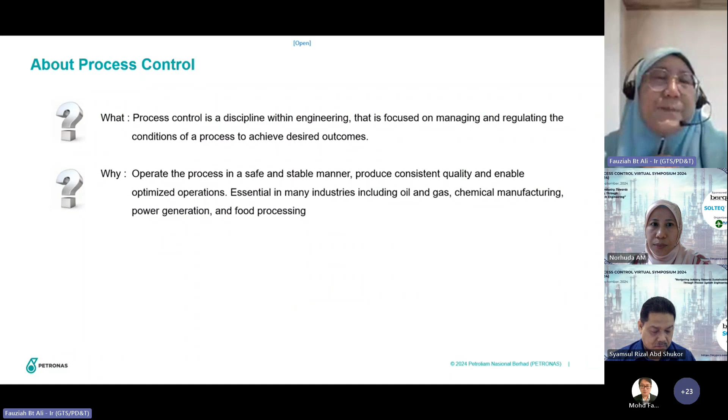So let's go into this a little bit about process control. So what is process control and why? To me, process control is a discipline within the engineering field that is focused on managing and regulating the conditions of a process to achieve our desired outcomes. And why do we have that? Because we need to operate the process in a safe and stable manner, produce consistent quality, and now process control is no longer about controlling, it is also about optimizing the process. It is essential in many industries: oil and gas, chemical manufacturing, power generation, and food processing.

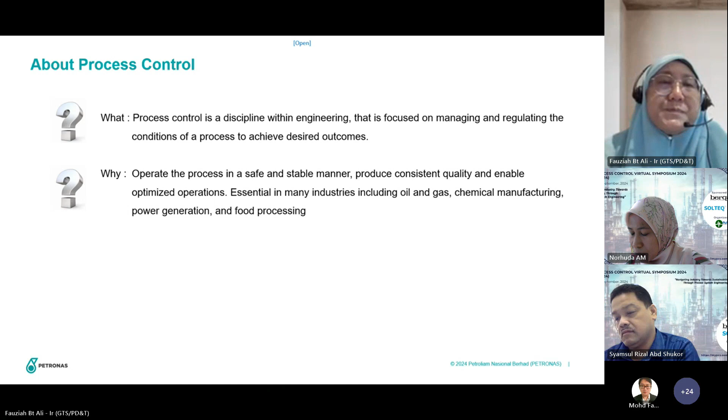And we'll be surprised, a lot of industries today are very tightly controlled. That is why, for example, our bread is very consistent. The bread that we buy, I will not mention brands, will taste the same no matter where you go. Every day they will taste the same. So process control is essential in a lot of industries. But I will focus mainly on the energy industry because that is where I spent time in my career.

So a little bit about the evolution of process control. Now, why do we want to go through the evolution? Because each stage essentially lays the foundation for the next stage. So by understanding the evolution of process control, it may help us to anticipate what will happen in the future.

So a long time ago, control was basically manual, based on operator experience. So people physically operate the plant, I guess the way we physically open our own taps at home, right? People will physically open certain valves. That's how they used to do it.

Then they have basic mechanical feedback control, which are all physical parts linked together. If I may, mechanical feedback control that still survives today, for example, would be our water closet, our toilet. When we flush, essentially there's a float and that will mechanically let in air and then let in water. And then when the water reaches a certain level, it will stop. So we always have water in our toilet tank, right? So that is the mechanical feedback controlling level. It is quite rough.

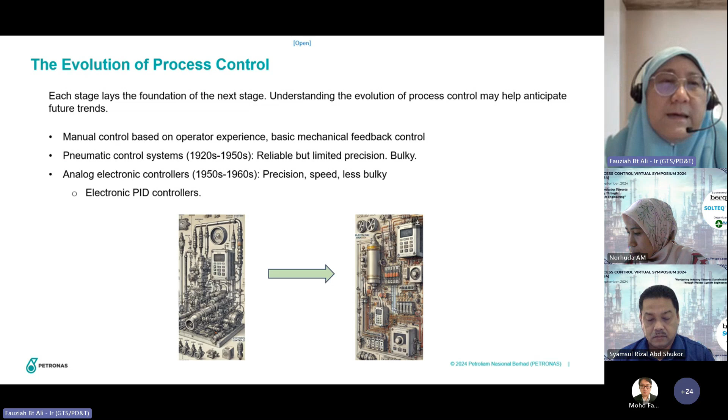Proceeded to pneumatic control systems, which are reliable but not very precise, and they're quite bulky. So later in the 50s, 60s, we had evolved to analog electronic controllers. They are more precise, they are quite fast, and they are less bulky. And there we have electronic PID controllers. So the photo I show below is the evolution from the bulky pneumatic controllers to the electronic PID controllers.

From there, later in the 70s onwards, right? We go to digital control systems.

Sorry, I am on PowerPoint mode. So if somehow I get disconnected, can somebody call my handphone? I know Professor Sam has got my phone number.

Okay. So moving forward to digital control systems, we have PLCs, which are maybe smaller scale but flexible, right? The scope is maybe more on individual equipment. We have DCS, distributed control system, and that involves multiple processors. We have SCADA for large-scale process supervision, mainly for data acquisition over a large geographical area, usually. And the device integration has become more simplified, more integrated.

We can now link with enterprise resource planning. So for example, from the planner, we could, if we wanted to, depending on the demand, actually directly control the process. We have multivariable predictive control, which essentially controls the whole envelope, the whole process, using model predictive control, controlling many variables to achieve a common objective. And nowadays we have wireless and mobile technologies, and that adds a lot of flexibility.

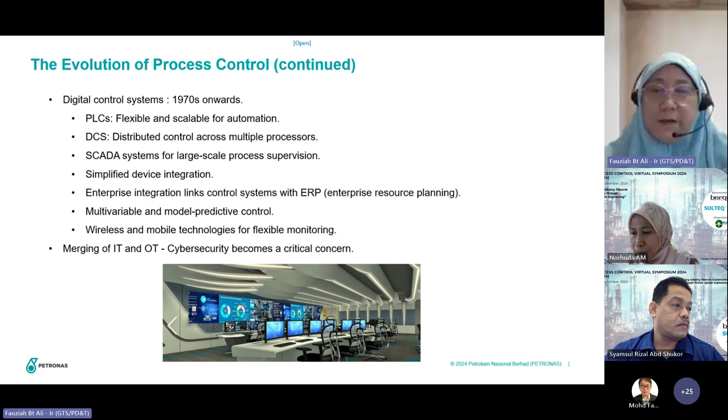So if we talk about going into the future with process control, then I would say key questions to be asked would be, what is the future? What type of processes will there be for process control to operate and optimize? Are we having the same processes that we are today? We have refineries, we have gas plants, or will there be different processes? And also, what will be the control technologies of the future? Will it just be multivariable predictive control, or will there be other control technologies?

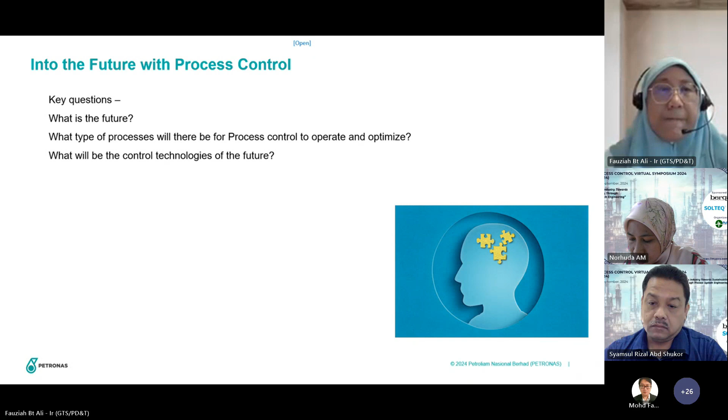So I see that among the major concerns for the future are, number one, many resources are depleting, right? Non-renewable resources like oil, gas, they are depleting. Minerals are depleting. A lot of natural resources we cannot replace. There's also climate change and environmental concerns. We know that we have a global temperature rise concern, and that has led to the Paris Agreement. And we are now seeing environmental concerns like pollution. We have smog. Of course, there are some people with conspiracy theories saying that climate change is a hoax. But being engineers, we follow science. So we say climate change is real.

And there's also the major concern of waste. If we just Google waste, we can see all around the world mounds and mounds of waste piling up everywhere, finding their way into the ocean, for example. So this is an area of major concern in the future.

So with these concerns, going into the future, there will be a lot of focus on conservation of resources. This will lead to asset operational excellence, where we will use less utilities, less fuel, less water, less steam, etc. So we need to get more for less, essentially. There's no wastage. We need to operate in a very, very efficient manner. Also, we will be finding renewable alternatives, so that we do not have to worry about depletion of resources. To combat climate change and environmental concerns, we will also find cleaner alternatives. And to combat waste, we will find technologies to enable a circular economy.

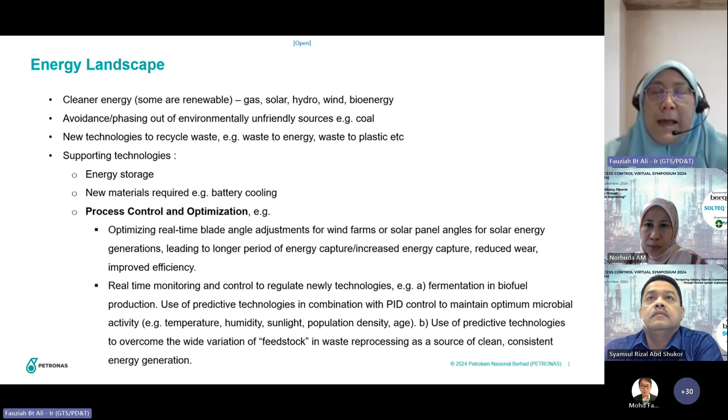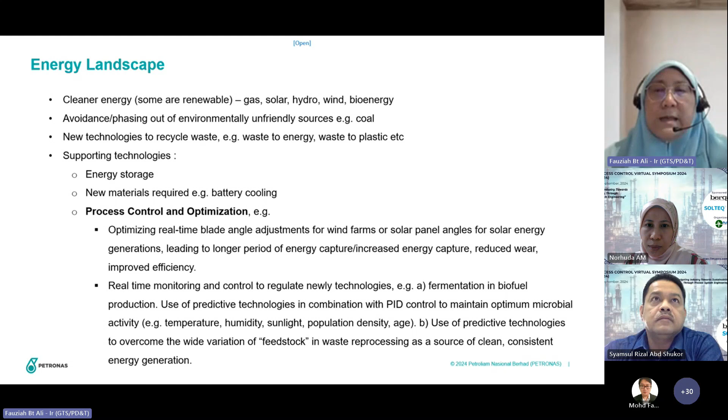We could also use predictive technologies to overcome a wide variation of feedstock in reprocessing waste. For example, in waste to energy, typically waste feedstock is highly variable in the feed quality. It's not like I am producing ethylene from ethane. My feedstock will be ethane, and they are quite consistent in quality. Processing waste will have a lot of variation in qualities, and definitely predictive technologies will be very helpful.

There will be a prevalent use of predictive technologies and more advanced algorithms for process control in today's emerging processes. So what today is maybe not yet commercialized, still maybe a trial pilot plant, eventually and very soon, we will implement predictive technology and advanced algorithms for this.

Also, there is prevalent use of digital twins, including in renewable energy, real-time closed-loop optimization, managing technical and economic trade-offs, as well as real-time change in energy demands. So these are high levels of control and optimization that I believe we need to be prepared for.

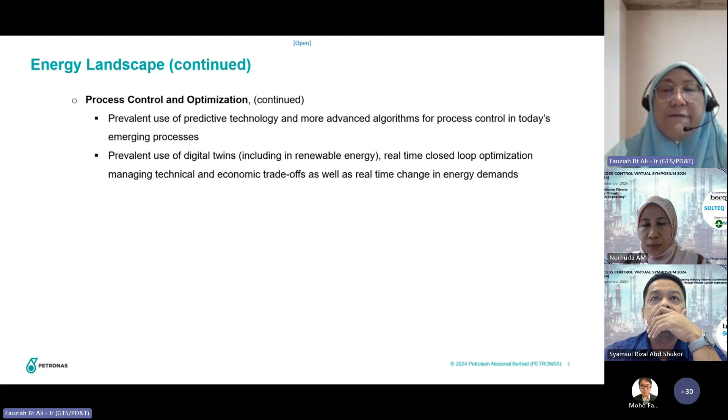So food for thought, are we rising to the challenge? Are we ready? Number one, can we embrace the new processes that are still in developing stage or have not been developed? When people are talking about, you know, from gray sources to blue, green, turquoise, whatever, right? Are we ready to embrace that these are the new processes? These are the processes of the future.

Okay. Are we ready to be part of development of new processes? If I'm going to be producing, for example, hydrogen fuel, is the control ready to support this new process? If I'm producing green methane or whatever, is process control ready with the technologies to control these new processes?

Are we able to learn, unlearn, and relearn? Some old technologies have got to be let go to be replaced by new technologies. Are we so attached to the old technologies that we reject new technologies? Also, are we able to adapt and apply new technologies intelligently? Because not everything new is better, right? Not everything old is good.

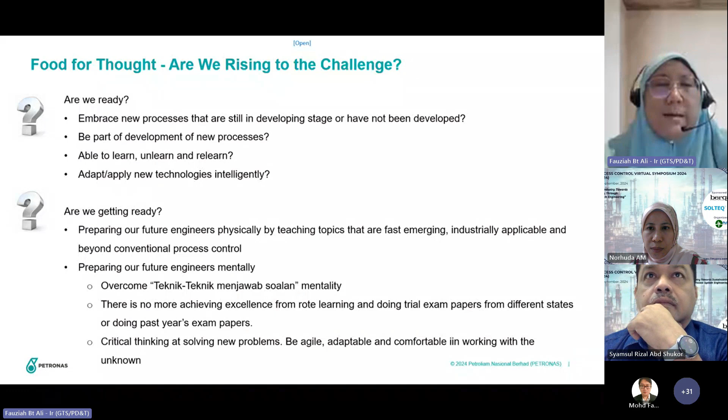Also, are we preparing our future engineers mentally? Because we need to overcome the mentality that was inculcated during school days, maybe primary, secondary school days. Teknik menjawab soalan. You have to learn how to solve the problem before your exam. And then we go to camp SPM or whatever. We have to overcome that mentality. There will be no more achieving excellence from rote learning. Doing trial exam papers from different states, doing the last 10 years of past exam papers, it will not work in the future because there is so much unknown.

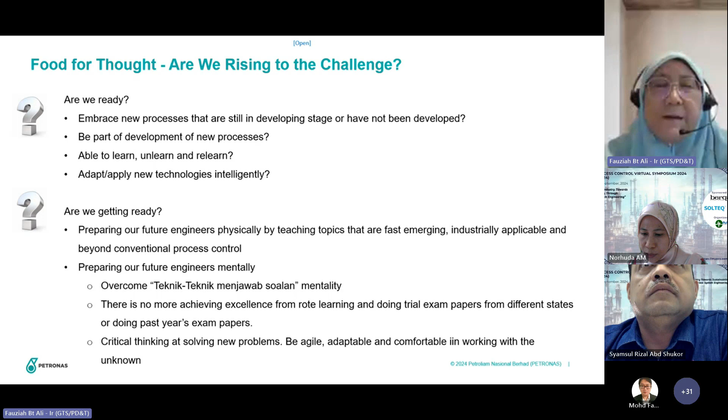Okay, so critical thinking at solving new problems is essential, because the problems and challenges that we see have not been seen before. So we have to be agile, adaptable, and comfortable in working with the unknown. These are the essential qualities of our future engineers. Otherwise, they will be very stressed out and they will avoid doing engineering because they are not comfortable with new things and unknown things.

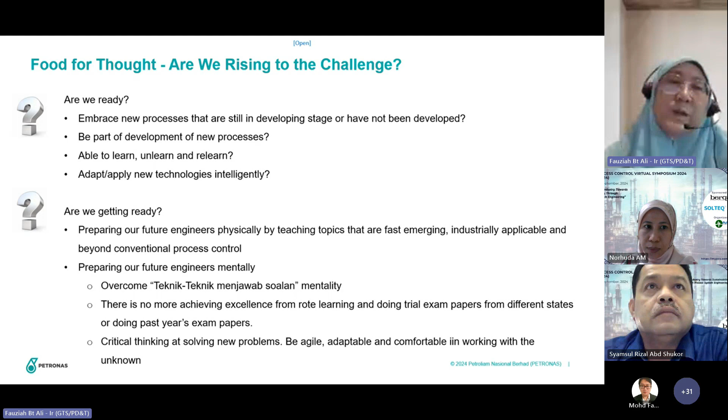With that, I end my speech with a quote by Steve Jobs: Innovation is the ability to see change as an opportunity, not a threat. So there is a lot of innovation going on now and in the future. So we have to embrace that as an opportunity and not be stressed out and not be afraid of them as a threat.